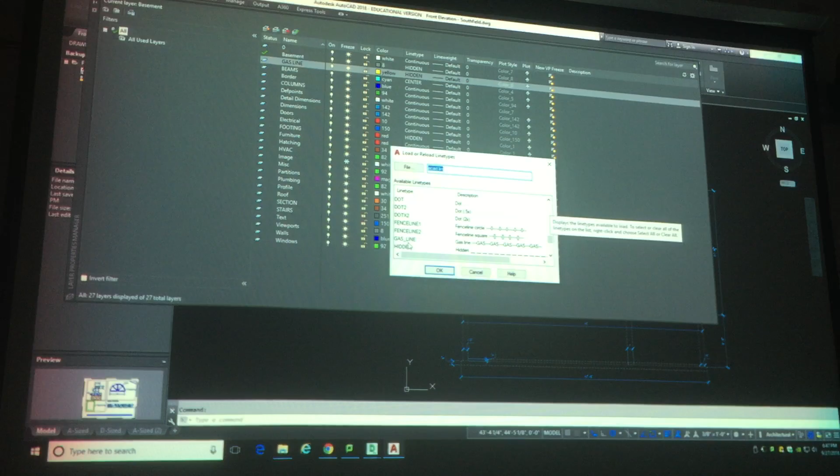If I click on load at this point, then I go down, I can grab a line type called gas. When I grab gas line and hit OK, I select it and hit OK, and then you see it's now been assigned to this layer. So now if I draw on this particular layer, just a line, this is what you get. All right, so that is how a line type works.

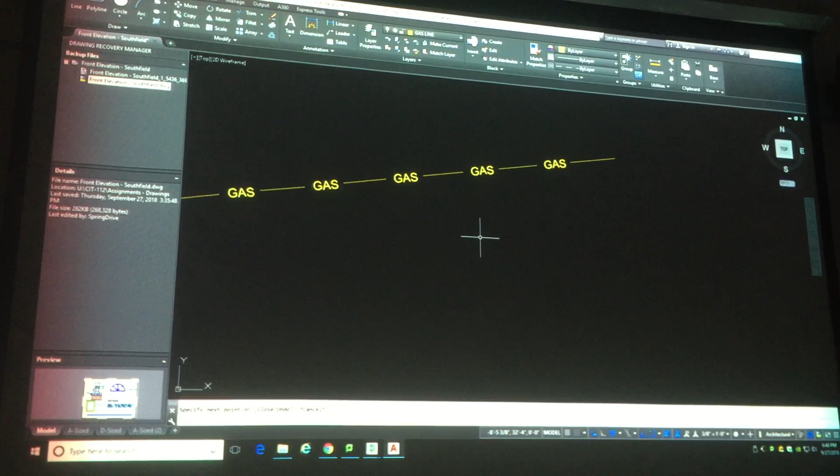And a line type can be a dashed line, it can be like what we have here, a gas line, hot water line. There are a lot of different line types, but I have some line types associated with the layers right now, so as long as you use the template, you're good to go. All right, so that is how that works.

So that's the bulk of what I want to show you guys tonight. So it's going to be this right here, this is what we're going to be working on. And I think that's enough to get you guys where you need to go. Are there any questions about that?

What about the window, the curved window? All right, that is here on your dimensions, on the dimension on the sheet.

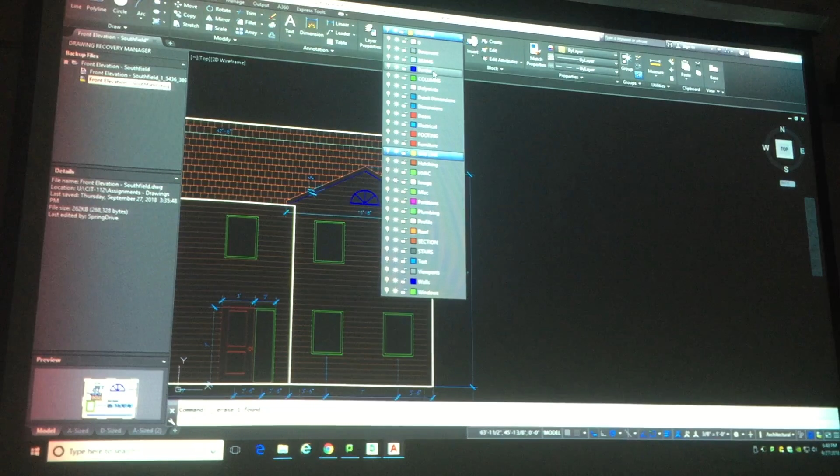All you do is this, okay, since it's 3 feet, what you would do is draw that window over here. This is where you would say, okay, let's make this window. So that's a detail type thing, so you might put on the border there. It might not be on the right layer, but we won't worry about that.

So I would go ahead and start my line command. I'd go here and say 3 feet. All right, 3 feet, cool. Now that gives me the bottom of it. And then the next thing it gives me is the radius. The radius is supposed to be 1 foot 6 inches, so that's 18 inches.

So I could do this by just putting in a circle with center and radius. I go here, center radius, I go there. I want a midpoint object snap, and I'm not seeing it, so I turn on midpoint, I go here. And then that's what I want, and I go to 18, and boom, that's about perfect.

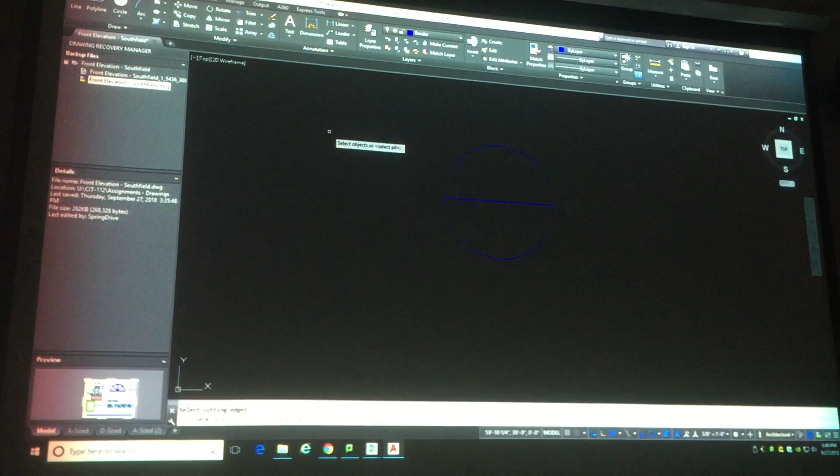Okay, so then what I would do is we learned about trim and the nuclear option. So I'm going to start with trim, hit everything, and go ahead and hit this, and that goes away. Now it tells us right now that the mullions are 1 inch thick.

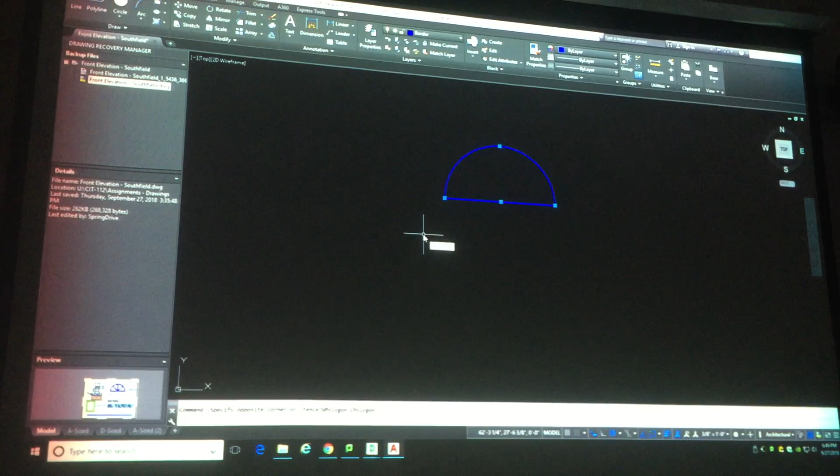So to get that first line, these are 2 individual lines. I could offset them one by one, but it'd be easier to turn this all into one polyline. So to do that, I just select them and type in J for join. I just typed in J at the command line, and now it's 1 unit.

All right, then I offset it 1 inch, I go here and go to there. Now once I got that, I've got to get my other elements inside here. So what I do is I start my line command again, going right from the center, because I know it's got to start there anyway. So I got that. Now I've got to offset it in both directions to get my thickness.

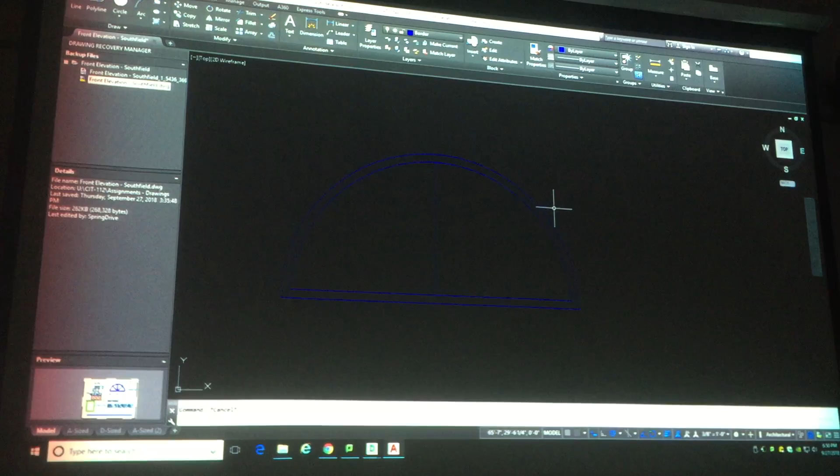So how far would I offset each of those? Half an inch. So I go ahead and offset, 0.5, like that. I go over here, over there, and like that. And that's that. This I don't really need anymore, but I'll leave it, I'll clean it out in a minute.

Now the next thing I can do is rotate those and make a copy. Now this is where it gets kind of cool. I could delete this, and to rotate and make a copy, I say okay, let's rotate this. So what do I want to rotate? These. And what's the base point? Right here between these. So I go here, then I go in this direction, or that direction. If I go in this direction, I think it's probably 45.

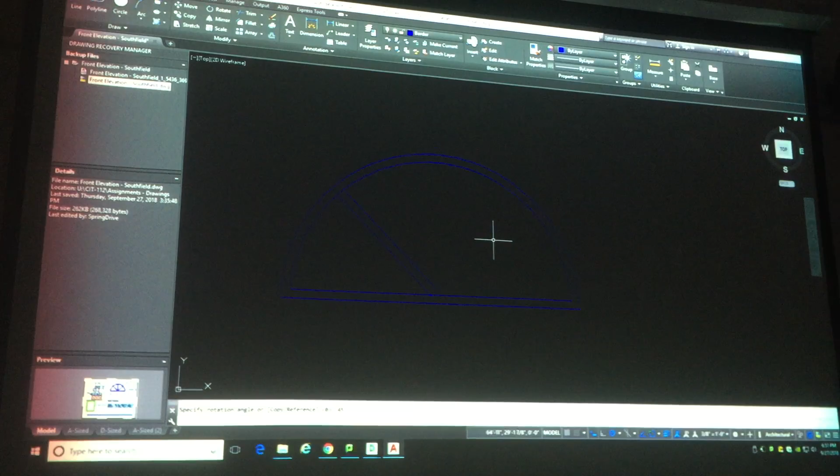And I didn't make a copy though. So what I should have done is make a copy. So I'll go back to rotate, grab this, and the base point's here. I'm going to type in, I want to make sure it's a copy, so I'll go ahead and type in 45.

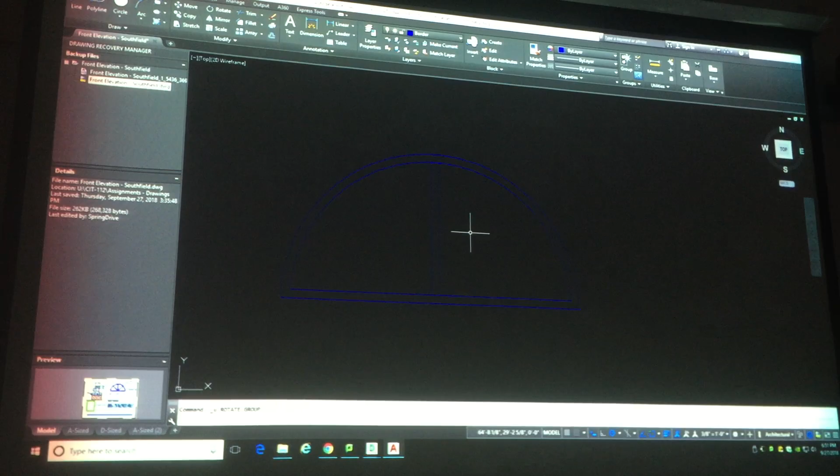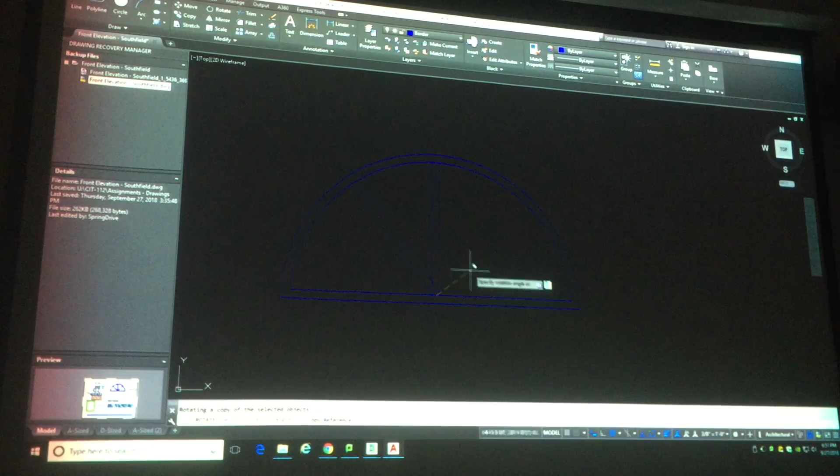It's kind of weird, the rotate command here is set up incorrectly. All right, let me fix it though. Go here, I'll go to the base point, and then I'll go to the copy mode. Choose copy, go to copy, 45. All right, got that. So you see how that worked there?

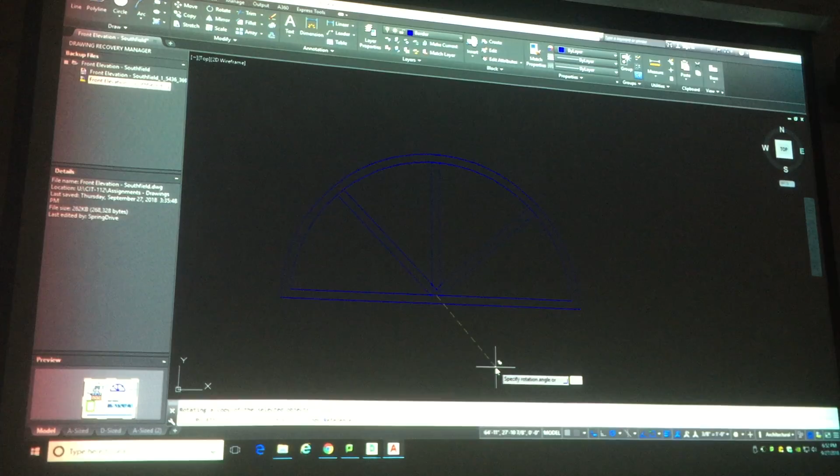Does that make sense? I rotate again, grab this one, and I'll do the same thing, grab the same base point. And then this one, if I want to make life easy for myself, I want to make it a copy. And then I'll say -45, which is the easy cheater way to do that instead of figuring out 315. So go to that. And that is how you create that.

Now, the last thing you can do is just extend these. We talked about the extend command last week; trim and extend act the same way. I'll use extend, and my boundary is going to be this. I right click, and then I click here, and here, and here, and here. And the last thing I have to do is just clean it up by trimming. So trim, and I just grab everything at the cutting edge.

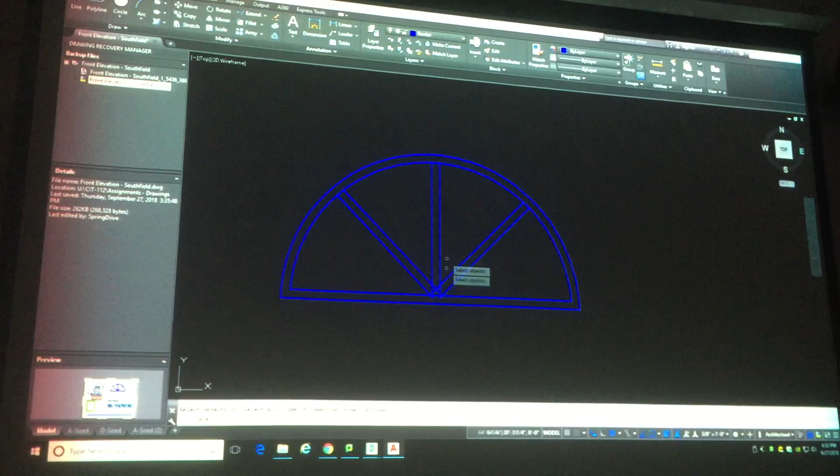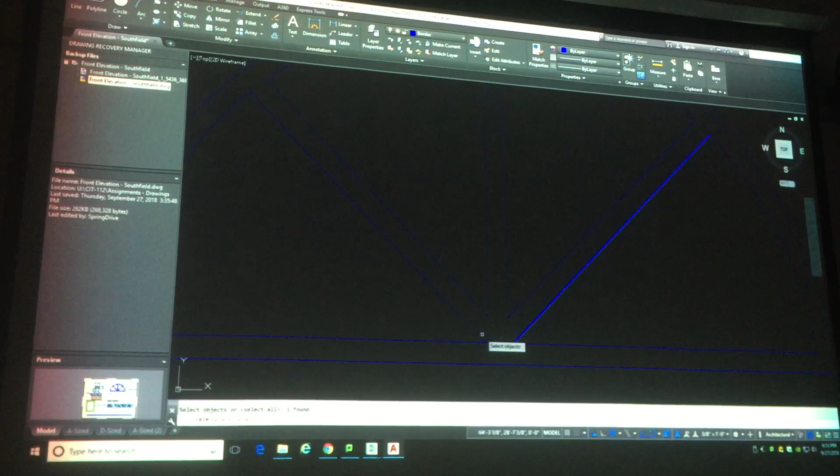And then you guys kind of get the feel of this thing here. I'm going to just kind of clean this up. Okay, and then down here, just have to erase these. Did that make sense how we did that? We just used the same kind of CAD commands we've been using all along, and just made them do our bidding for us.

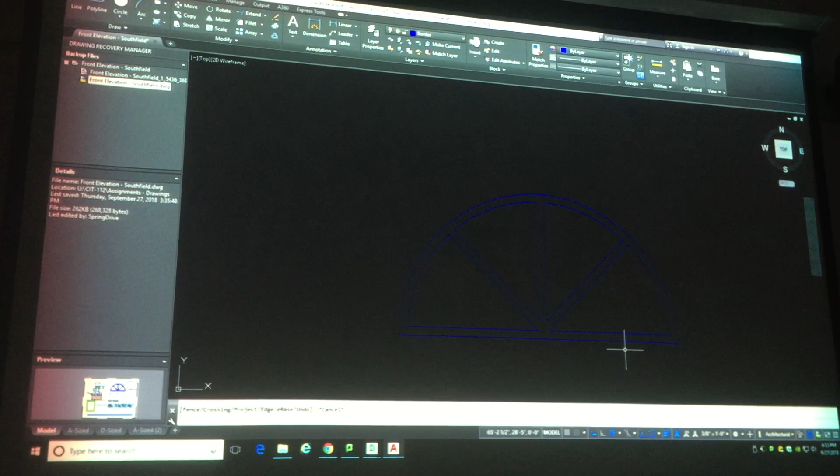And that's how you make that window. There's other ways to do it. That's just one way that you can make that happen. Any questions about that? Okay, so that is how you do that, and then you could turn it into a block and just drop it, but you don't have to. If that's okay, then I'll come back and do a little more teaching later on. But that's the basics of what we've learned so far.

I did want to talk about one last thing, and that is the move command, because the move command and all the modify commands work the same way. When you start the move command, there's 5 steps, and these 5 steps are the same for a lot of the editing commands. Number 1, start the command. Number 2, select the objects. Now we're just going to sit here in a stare down match until I tell AutoCAD I want to move to the next thing. So you right click, hit enter or hit the space bar.

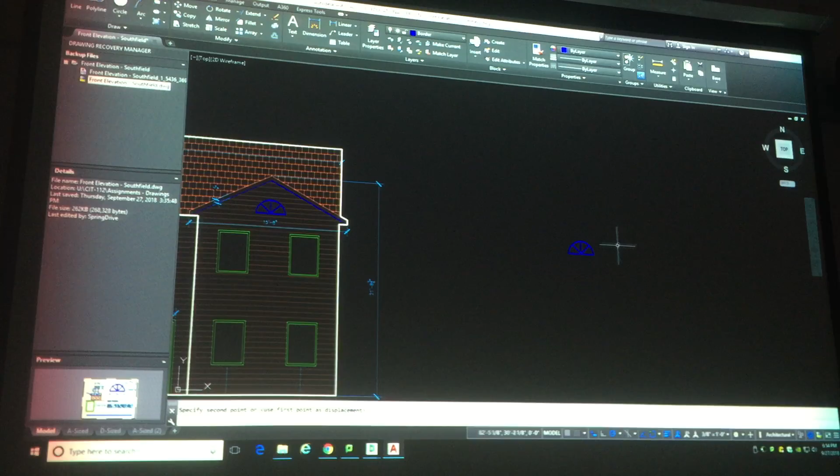Now I have to give it a base point. My base point is here, this is where I start from. And then I tell it where to go to. So 5 steps. Number 1, you start the command. Number 2, you select the objects. Number 3, you right click. Number 4, we select the base point. Number 5, we tell the final point. And they operate pretty much the same way with all these commands clustered up here.

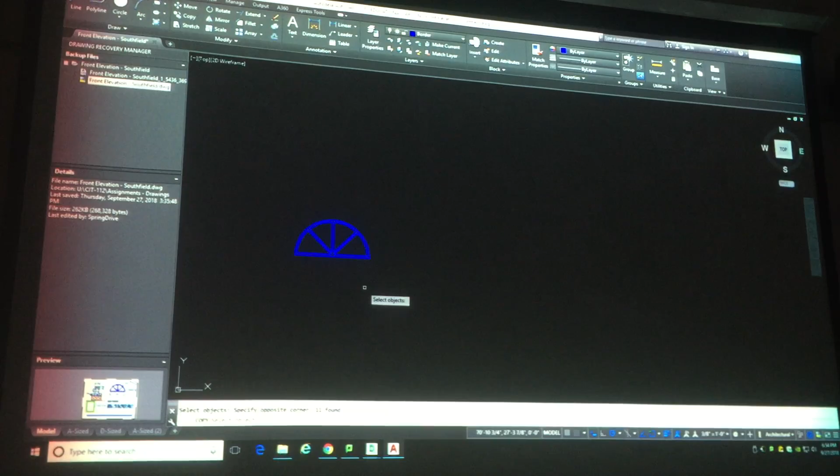Copy. We start the copy command, number 1. Number 2, select objects. Number 3, you right click. Number 4, you select the base point. And number 5, you pick where you want them to go. Next one is rotate. Number 1, start the command. Number 2, select objects. Number 3, right click. Number 4, select the base point. Number 5, tell it the angle. So they all operate on those 5 basic steps.

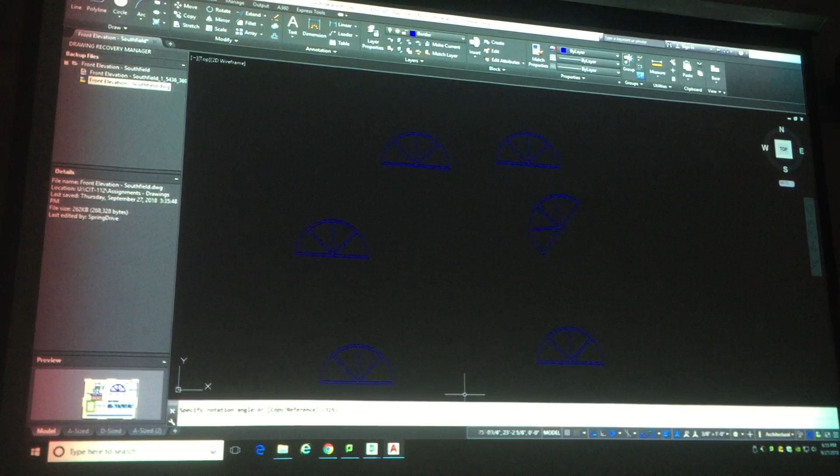Mirror operates the same way. You get the idea, I don't want to bore you. Mirror, scale, they all work the same way. It won't do anything until you right click, and then it's going to ask for base point. So you just have to read your command line, and notice that as I'm working with AutoCAD, it's asking me right along what's going on. Like this one, we go to move. Number 1, number 2, number 3, we right click, and notice down here it's saying what you're supposed to do.

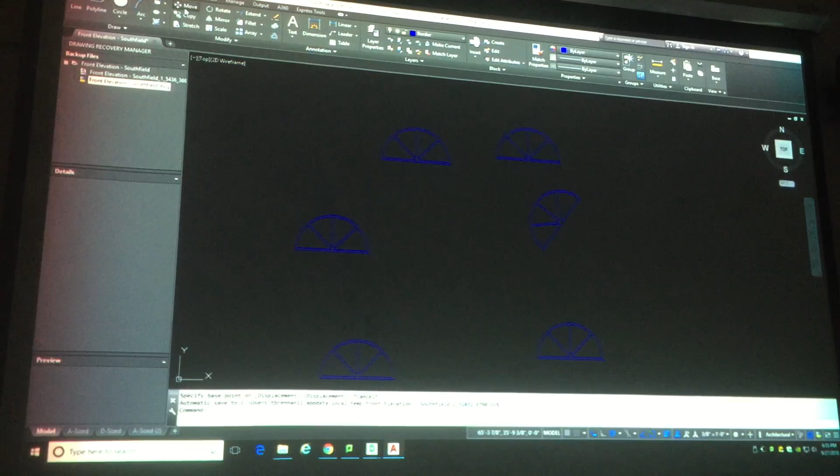Start the move command. It also says it down here in the command line: select objects. I select my objects. I right click. Now specify base point. I specify the base point. And then I tell it where it's going to go. So it's going to show up on your command line.